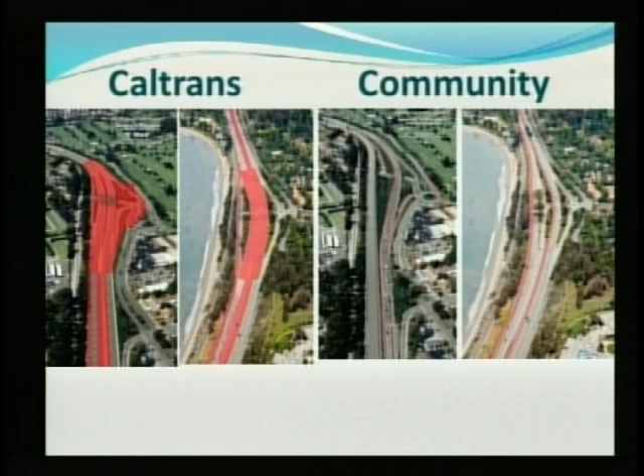So what I'd like to do is go into some of the details. I know we're short on time, but I want to give you some of the details so you better understand what's at stake and how we came to the determination that we did in some of our summary. So if we can go to the next slide, please.

Our first effort, the effort of this presentation, is to compare the alternatives from CalTrans and the community. We've broken it into two time periods: the construction phase and what it looks like when we've completed it. Next one, please.

And our objectives were very simple. We wanted to minimize the length of time it takes to construct it. We wanted to minimize the amount of disruption experienced by the local community and by the region. We wanted to spend the money wisely, and we wanted to solve the problems. The next one.

If you look at the slide on the right, the first thing to register, and Ron, if you can show them, missing from this picture is that there currently exists a northbound left-hand off-ramp at Cabrillo Hot Springs. In our alternative, that gets removed. It doesn't get removed at the outset, but it does get removed when it's built. Our project involves adding a third lane northbound, right there.

And then on the right-hand side, we bring something similar to modified F, but with a notable exception. We bring an off-ramp into a revised roundabout. That roundabout currently is already problematic. In the DEIR that CalTrans produced, they indicate that in just over a decade it becomes level of service F. We increase its capacity. We bring the off-ramp into the roundabout without a stop signal. The signal is an important note.

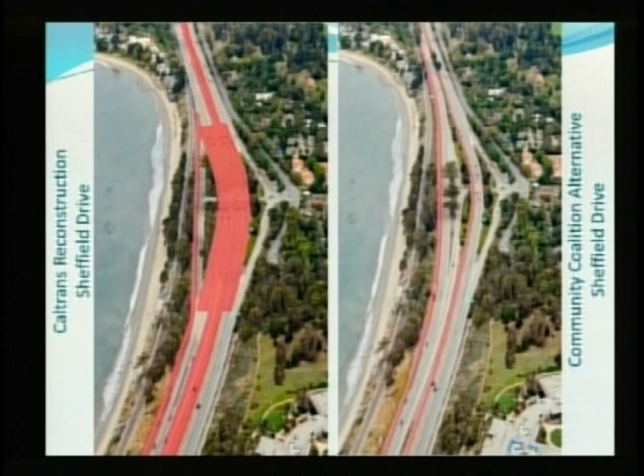Left-hand side is CalTrans' approach to Sheffield. There is no detail on how they will build it or how they'll route the traffic. They give assurances that they'll make it work, but I will tell you between Cabrillo Hot Springs and Sheffield, there's some 30,000 truckloads of material that have to be brought in for fill or taken out and moved somewhere else. On the right-hand side, our version, we add a third lane northbound, we add a third lane southbound, and we keep the left-hand off-ramp.

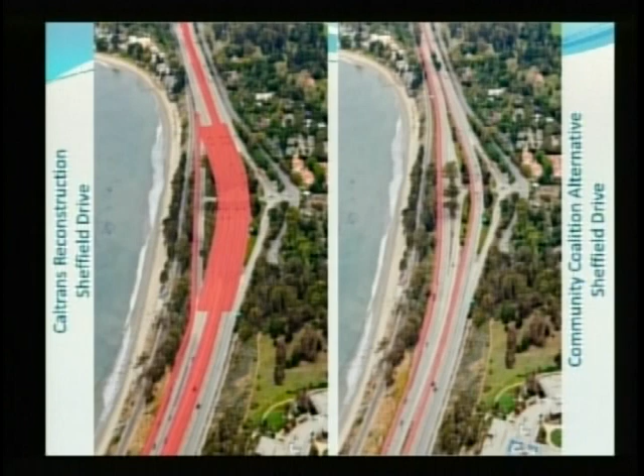Let's go to the next one, please. If we look at the construction phase, what are the impacts we've got? The analysis that our consultants came up with is that to construct the CalTrans version, it will take 51 months, slightly over 4 years. It will take 19 months to construct the community alternative.

The disruption in the traffic, I just covered it: the off-ramps are closed for virtually the entire duration of the construction at Cabrillo Hot Springs. In the case of the community alternative, all that work is done off the freeway. The ramps are kept open.

The CalTrans cost for the Cabrillo Hot Springs, which is the only one they clearly break out, is $50 million. The cost of doing the community alternative is $15 million. And for this section of the entire project, it's estimated that the CalTrans portion would cost $185 million. Ours would cost $135 million, representing a 27% savings.

There's one issue that is not touched on at all in the draft environmental document. And I will tell you, in the outreach that we've done over the last 2 months, it is an area of considerable concern. And that has to do with the economic impacts of this much closure and this much disruption.

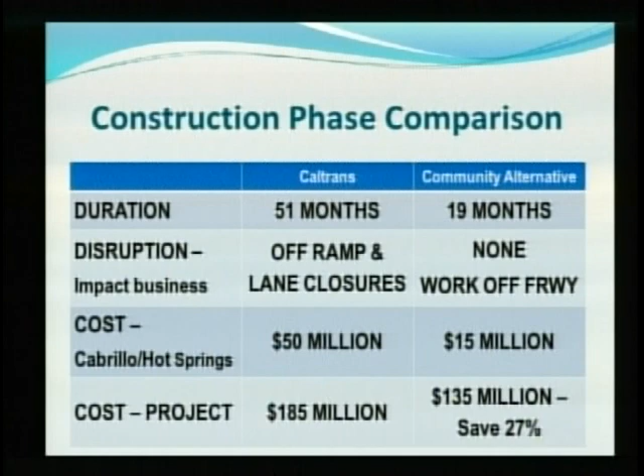So let's go to the next issue, which is a big one. It has to do with the left side ramps and their safety. We have a copy of Mr. Dockery's letter. I suppose this is what you would call a one-size-fits-all solution approach, and we think that's wrong. We think it totally ignores local experience and local knowledge.

If you look at the history of Route 2 southbound left-hand off-ramps, they are safer, and this came straight out of the CalTrans DEIR. They are safer than the 5 previous right-hand off-ramps in the city of Santa Barbara, starting at Milpas and Garden, Castillo, Carrillo, Mission. So when we're told that they're not safe, they have data that says, not so fast.

In the DEIR, there are a number of proposals that are disqualified from any further consideration. And basically what it says in the document is driver expectations. You're driving along, you don't know there's a left-hand off-ramp, it causes confusion. CalTrans never took the time to ask the question, who uses these off-ramps? Whose expectations are we talking about?

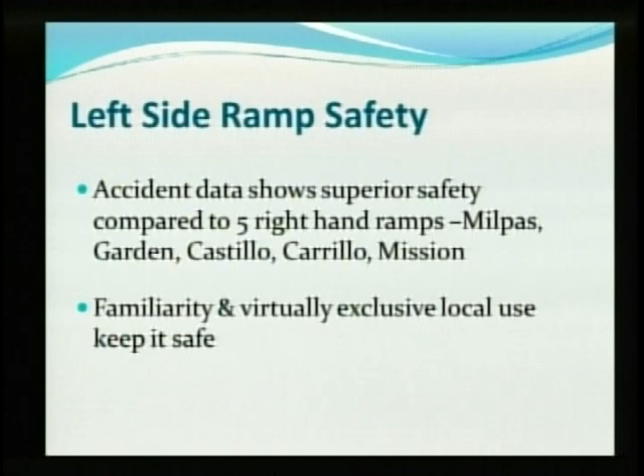Let's go to the next issue, and I'm running really short on time. Let's talk about the HOV lanes, because that is a second exception that would need to be granted. There's a lengthy discussion in the consultant's report about the efficacy of HOV lanes. I'll just touch on 2 quick points.

Studies show that over 50% of the people who use HOV lanes are family occupants. So you don't really take a car off the freeway when your spouse is in the car with you or your child is in the car with you. And I think that occupancy component would be especially true in a tourist area.

History shows that HOV lanes have not served as an effective incentive for carpooling. Historically, carpooling was about 14% of the traveling public. It's now under 12% of the traveling public.

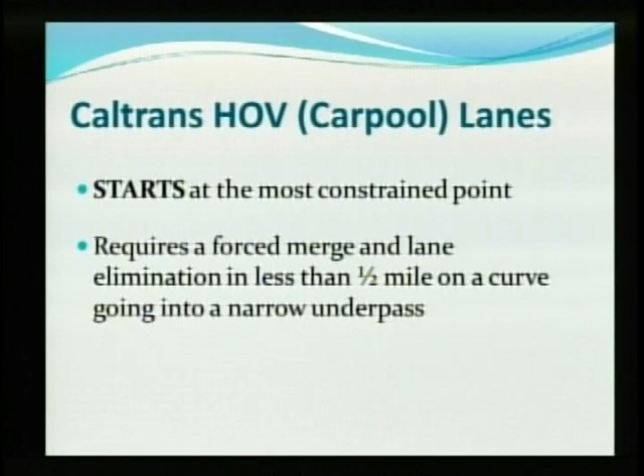But that's not really what we want to focus on. What we want to focus on, our real issue, is where does the HOV lane start? So if I can have the next slide. No, next one.

Ron, maybe you can help me with this. If you look right on the CalTrans design, right where you have the T right there, what's happening there is you have a new right-hand on-ramp that comes into the freeway. You have 3 general-purpose lanes. And then in California, in order to start an HOV lane, you have to add a 4th lane.

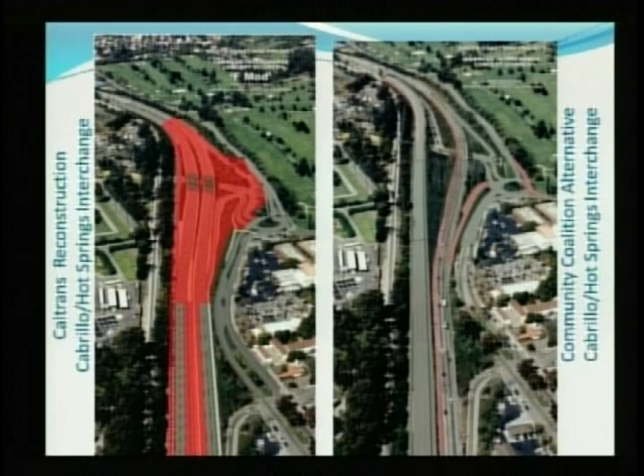So right there, if you look at it optically, it is the most constrained, most congested part of the entire corridor. And so what this proposal is, count them. We've got 1, 2, 3, 4, 5 lanes we're trying to stuff in the narrowest part of the entire corridor. And then what you don't see that's off the bottom of this picture is there's a sharp, for you golfers, there's a sharp curve, dogleg to the left, that then feeds into a 60-year-old underpass at Olive Mill.

Just before you get to that, there's a right-hand off-ramp. So you got people getting off, you had people getting on, and then when you go under that underpass, we have to lose a lane. For the sake of the HOV at this point, we have to lose one of the general purpose lanes. It's a recipe for a bottleneck. We have it now. We lose a lane when we go under the underpass. We're going to force a merge, and it's just going to be more congestion.

Okay, let's go back one. Our problems in looking at the operations of this freeway when it gets built. You have what I just touched on. You have a carpool lane that is going to force a merge. Our problem isn't with the carpool lane, it's where it starts. And our suggestion is get it out of the congested corridor, put it over into the flat area just beyond, in Summerland, somewhere between Evans and Padaro, where you've got a lot more right-of-way. It's a straight section. The best thing to operate in this corridor is 3 straight lanes through, minimize the turbulence in the area.

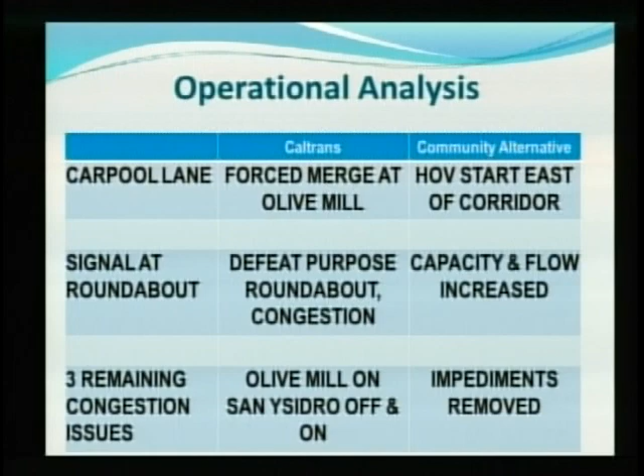Mr. Overall, thank you. We practiced this. I really want to thank you. I thought you did a brilliant job. And we don't usually clap, but I think you folks maybe ought to clap for him because he really put a lot of work into that. Madam Chair? Thank you. Now, Director Richardson has a question, yes, and we also have public comment. I'd like to offer the suggestion that his presentation was so thorough and concentrated that he didn't have sufficient time to give an adequate presentation. With the acceptance of the rest of the committee, I would ask that you extend his time. I would agree. All right. Is there a motion to extend his time? How much time are you talking about? How much time do you need? I'll do it in less than 5 minutes. Okay. All right. Everybody okay with 5 minutes? All right. You already convinced me. And remember, we're only receiving and filing, so you don't have to be real convincing. Sometimes you can talk too long.

All right. I want to talk about the rest of the operation. When you come through that Olive Mill underpass headed south, there are 3 more problems with making this freeway system operate well. And we totally support the need to relieve the congestion. The problems are these. You come through that Olive Mill underpass, and then the Olive Mill or Coast Village Road extension, which becomes an on-ramp onto the freeway at Olive Mill. It's a steep on-ramp. It declines in altitude. It's a short on-ramp as it comes into the freeway. And then there's a fairly significant bend to the right. It's a blind corner. So you have the potential of a safety problem and congestion right there where they meet.